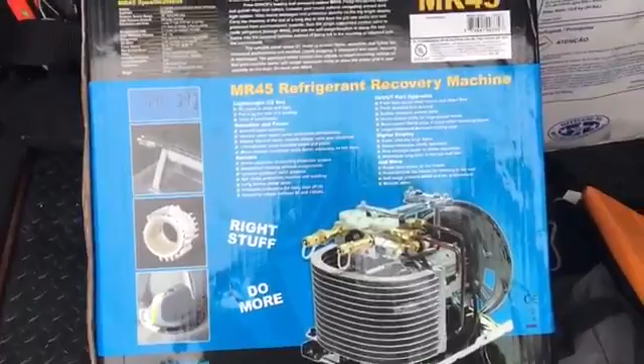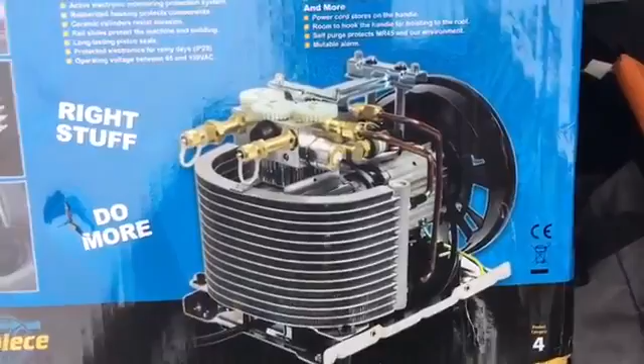This is the back of the box, and it shows you the unit if it was taken apart. You've got your micro channel condenser, your compressor and motor, condenser fan motor, and your valves. That's what the inside looks like. It shows the inside of the cylinders, power cord storage, your knob, and let's get into some specs here.

Some of these things you'll probably want to know. Of course, the weight, 22 pounds. Those are your dimensions, 14.8 inches by 9.8 inches by 13.5 inches.

It has an 11mm stainless mesh screen on your inlet port. Max current draw, this is important, 12 amps AC. Your power source can go down to 95 volts and up to 130 volts at 60 hertz.

It has a DC motor that's 1 horsepower, variable smart speed. The compressor is twin cylinder reciprocating and it's oilless. Your final recovery vacuum is 14.9 inches. This is important, the high pressure shutoff is at 558 psig normal.

Okay, so next let's get this thing opened up and check it out. When you open it up, it looks like we got some spare inlet screens right here. See the mesh screens? They do provide you with some spares and some O-rings for that.

Spare inlet filter screens, don't lose those, you're gonna need them. Now I'm gonna put a filter dryer on my recovery unit. I always have. You'll see on my old recovery unit back there, let's zoom in. I always had a filter dryer on there, see the little black filter dryer? I'm gonna put one on this unit as well.

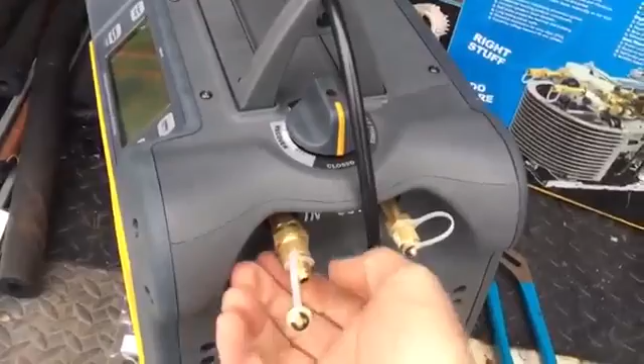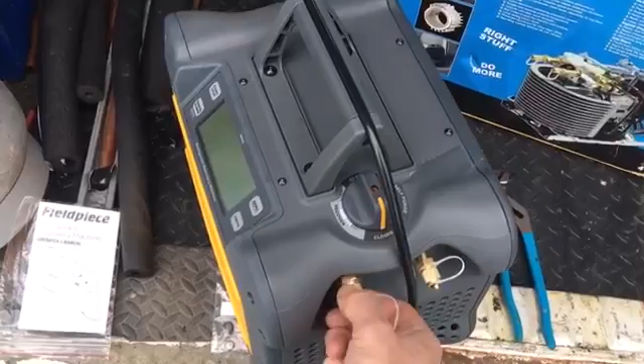Okay, so on your inlet, this will come off. There's your O-ring, so you get new O-rings with your inlet screen kit, and then there's the inlet screen. You'll want to periodically check that to get it all cleaned up and changed out. I'm going to put a filter dryer on mine, so that should help it stay cleaner longer. I've always done that with my recovery machines.

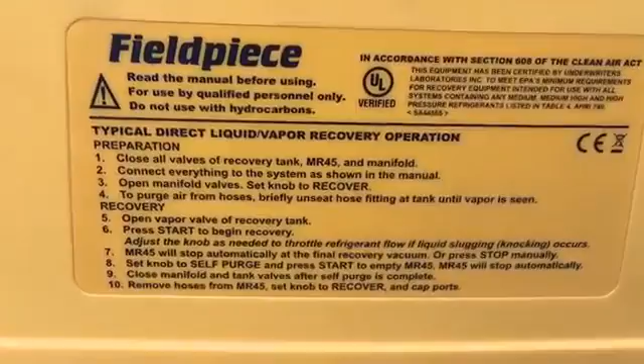It does have operation instructions on one side panel to get you right through there, and we'll go over this. And I got a job we can use it on today, so let's get out there and give this thing a workout.

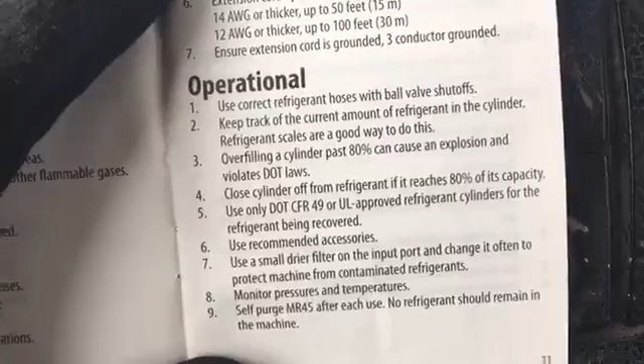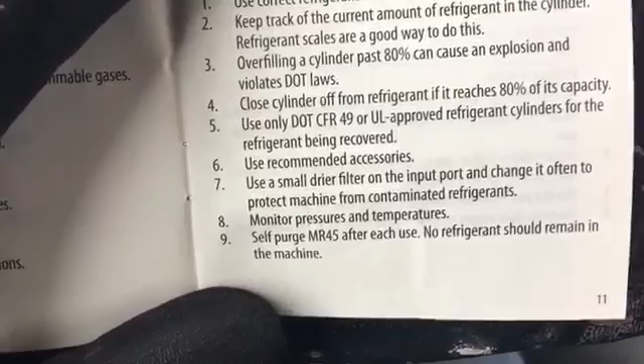Okay, so in the manual here, there's some good information. If you look at number 7 there, this is right from the printed Fieldpiece manual: use a small drier filter on the input port and change it often to protect the machine from contaminated refrigerants. Self-purge after each use, no refrigerant should remain in the machine. So these are good tips.

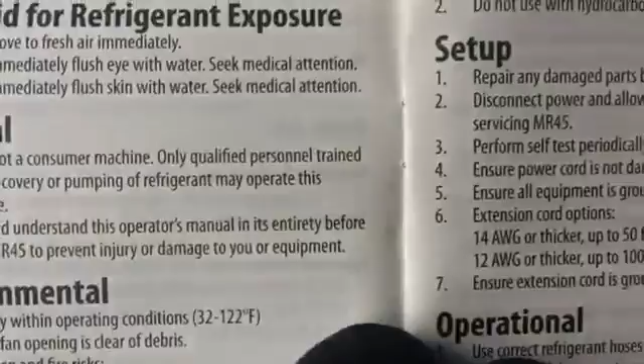Oh, there was another one on here too: do not use with hydrocarbons. On this page here is an overview of what the screen will display — your input pressure, your output pressure, status icons and messages, and your 4 buttons. I'll go over this when I get the unit plugged in and working later.

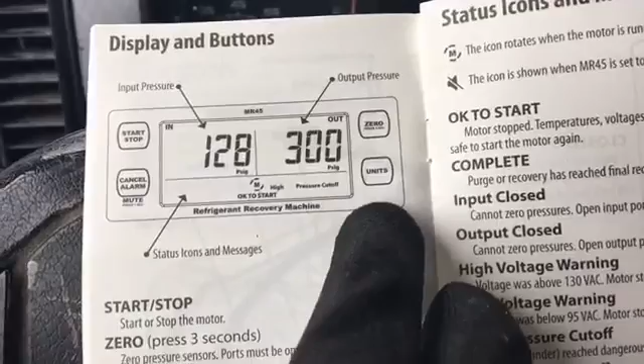Okay, I thought I'd share this one with you: dynamic pressure measurement. The MR45 pressure readings are designed only for monitoring pressures. Do not use the MR45...

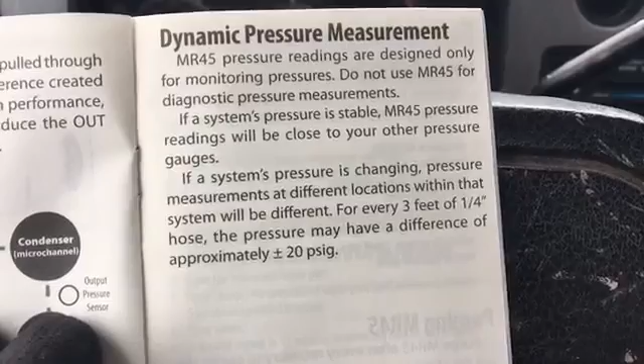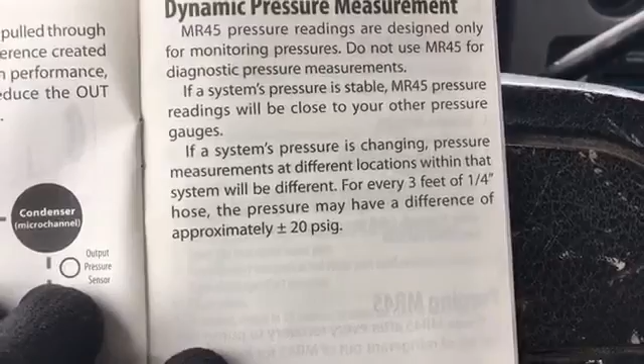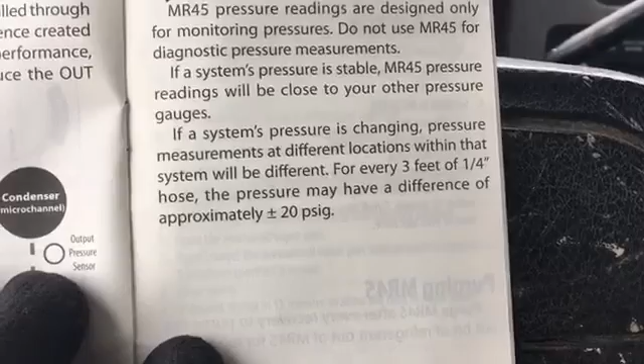The MR45 is not used for diagnostic pressure measurements. If a system's pressure is stable, the MR45 pressure reading will be close to your other pressure gauges. If a system's pressure is changing, pressure measurements at different locations within that system will differ. For every 3 feet of 1/4 inch hose, the pressure may have a difference of approximately plus or minus 20 psig. So that's good information there.

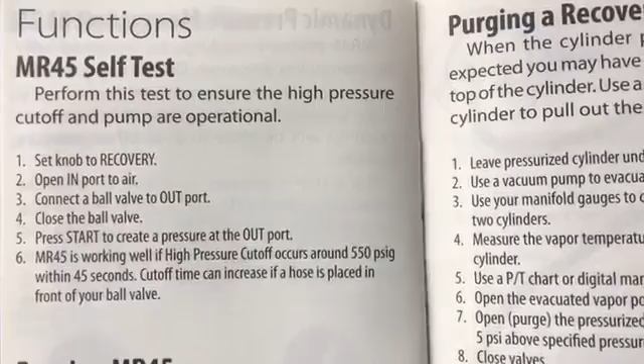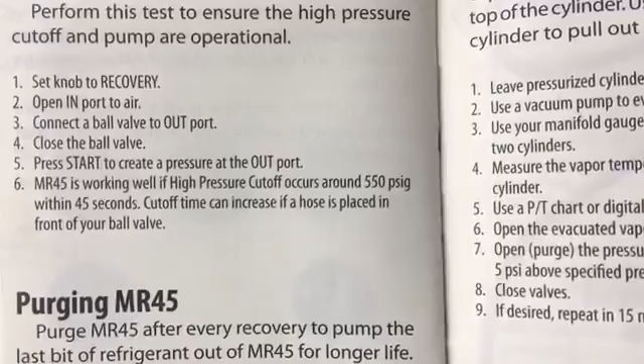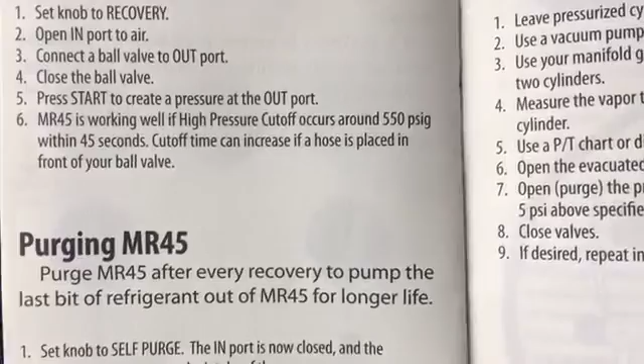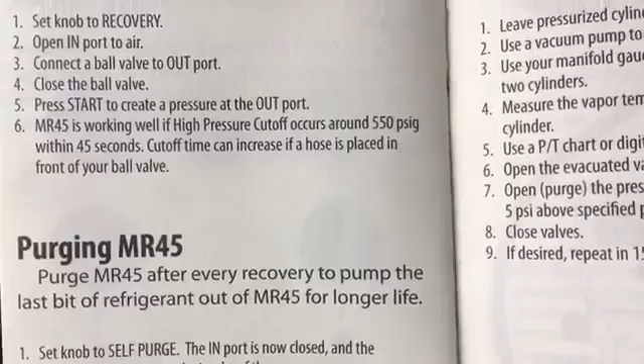MR45 self-test: perform this test to ensure the high pressure cutoff and pump are operational. Set the knob to recovery, open the in port to the air, connect the ball valve to the out port, close the ball valve, and press start to create pressure at the out port. The MR45 is working well if high pressure cutoff occurs at 550 psig within 45 seconds. Cutoff time can increase if a hose is placed in front of your ball valve. So that's the basic self-test.

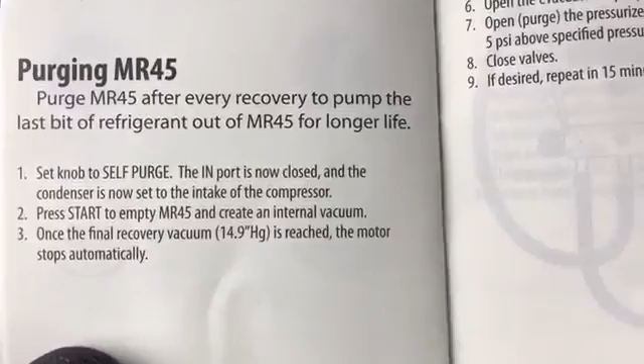You also want to purge the MR45 after every recovery, to pump the last bit of refrigerant out of the MR45 for longer life. The instructions show the different ways of doing recovery.

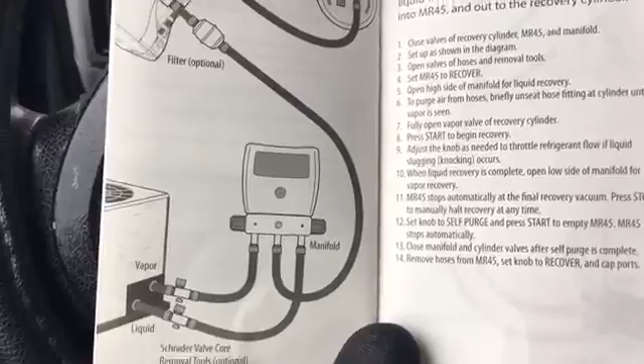This is just your basic regular setup, how most of you do your units - direct liquid vapor recovery. If you get on bigger units, over 30 pounds, they want you to use the push-pull method. You can take a look at that right here. If you've never seen that before, there's a nice diagram in the instructions.

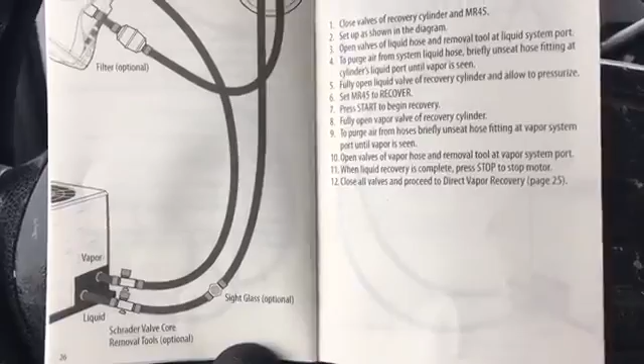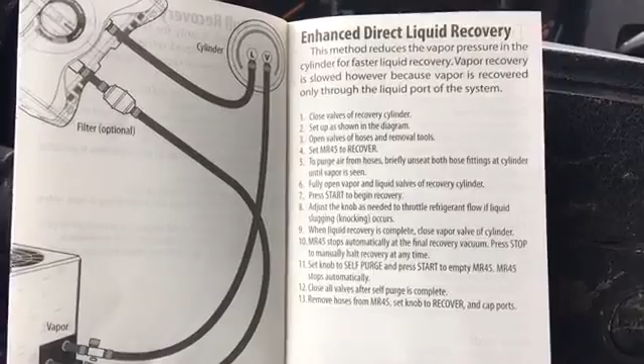It also shows here enhanced direct liquid recovery. This method reduces the vapor pressure in the cylinder for faster liquid recovery. Vapor recovery is slowed, however, because vapor is recovered only through the liquid port of the system. So it shows you another way to hook that up - I'll let you guys look at that for a sec.

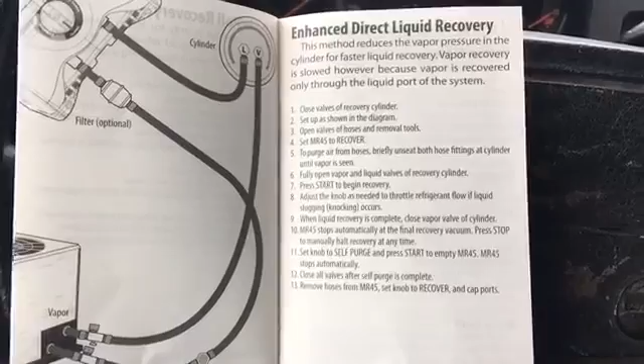You do get some troubleshooting information in here. Let's turn the page and see what's next.

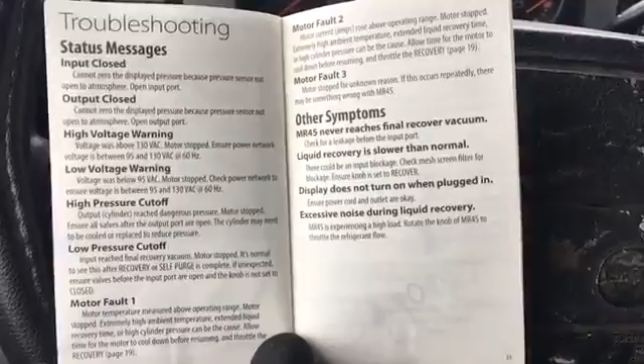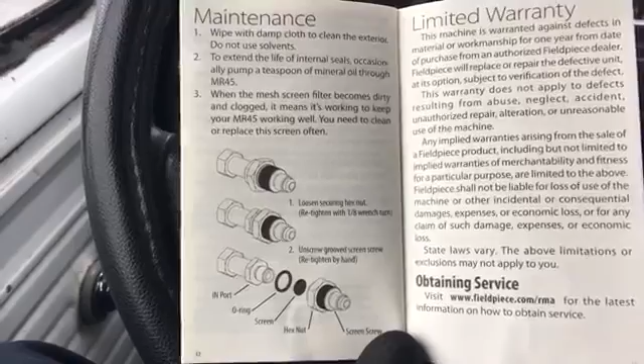I think this is maintenance. Occasionally pump a teaspoon of mineral oil through the MR45. That's good information. When the mesh screen filters become dirty and clogged, it means it's working to keep the MR45 working well. You need to clean or replace the screens often. And it goes over the limited warranty.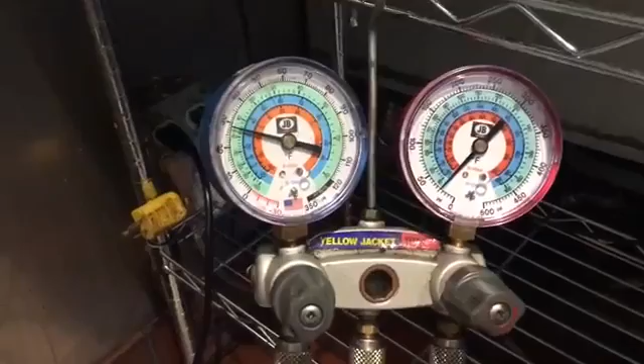Okay, so what do we got? Turbo Air, 9.5 ounces. Turning on my makeup table here - that's a little 2-door makeup unit. So let's go get this recovered. Okay, so I got the valves open, and this thing's supposed to hold 9.5 ounces, that's on the back of the Turbo Air. We'll see how fast it cranks that out of there. Let's see, we're at 10:56 a.m. Ready to talk.

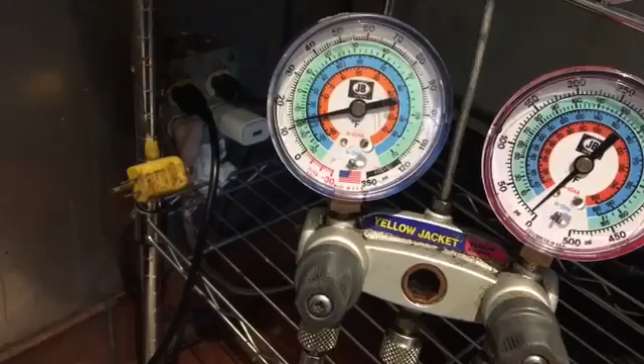Sounds like real world. I'll stand up and walk away from it.

Took about a minute and a half to 2 minutes to get to zero for 9.5 ounces.

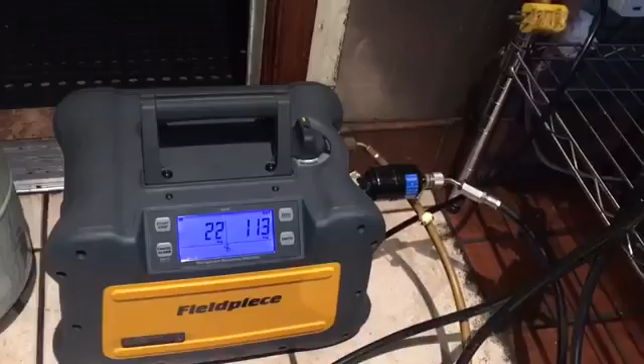So it stops itself and then it tells you, hey, I'm done. Very cool. Okay, now we're self-purging. I got the inlet closed, and we're on our self-purge feature.

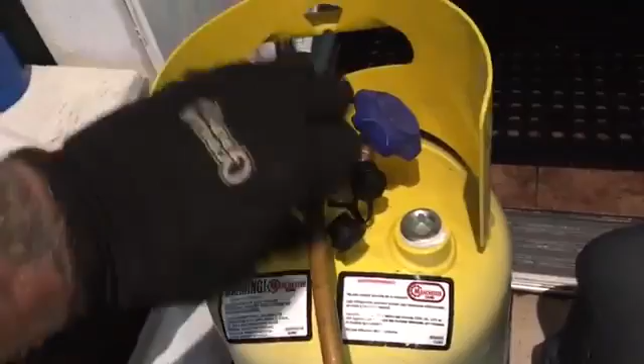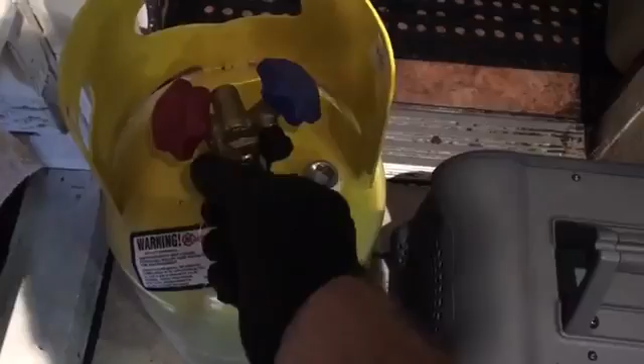Complete. So we're purged, that's off. Turn that to closed. Not bad, not too shabby. And there we are - took about 4 minutes total for 9.5 ounces. Not too bad, that's with the self-purge.

Alright, so after using it, I really like how light it is. It's really lightweight, it seems to work fine. I'll try and get it on some bigger units, so stay tuned. I would recommend this recovery machine for sure.

It's built well, it's rainproof, lightweight, easy to use, and that's the Fieldpiece MR45, or MR45 variable speed refrigerant recovery machine. If you need a recovery machine, check this unit out, purchase one, and I hope you enjoy it. They did a really good job on this, Fieldpiece did. And if you like it, check one out, and I hope you enjoy it.